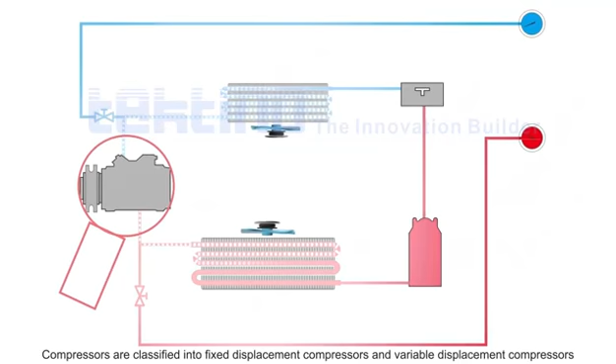Compressors are classified into fixed displacement compressors and variable displacement compressors according to different control mechanisms. Some variable displacement compressors do not have a clutch, and some have a clutch.

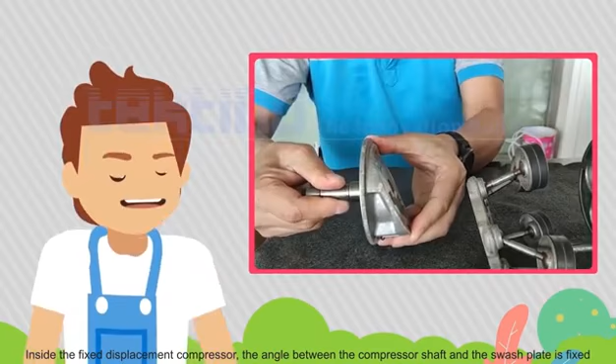Inside the fixed displacement compressor, the angle between the compressor shaft and the swash plate is fixed. Therefore, when the compressor rotates, the amount of compressed refrigerant per revolution is fixed.

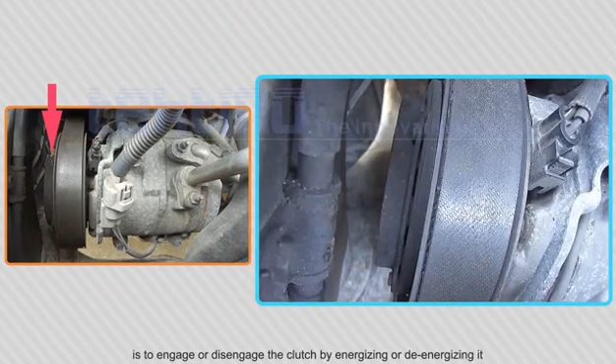The control of a fixed displacement compressor is to engage or disengage the clutch by energizing or de-energizing it. When the clutch is disengaged, the compressor does not work. When the clutch is engaged, the compressor starts to work. Once the compressor starts to work, the amount of refrigerant compressed per revolution is fixed.

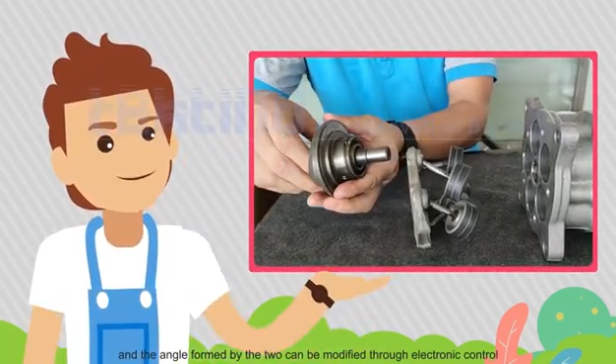While the connection between the compressor shaft and the swash plate of a variable displacement compressor is adjustable, and the angle formed by the two can be modified through electronic control. Different angles result in different stroke displacements of the piston, thus the amount of refrigerant compressed per revolution is changed.

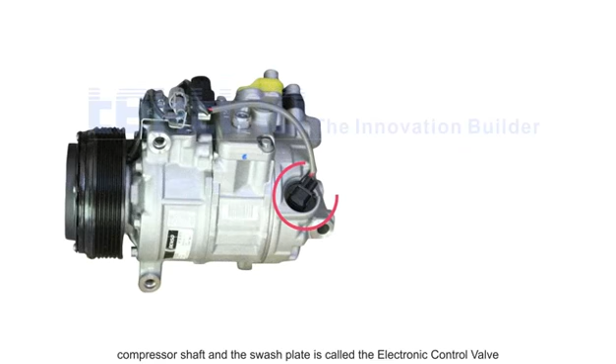The component that controls the angle between the compressor shaft and the swash plate is called the electronic control valve, ECV valve in short, located at the opposite end of the compressor drive belt.

The ECV valve spool has 3 orifices, which are respectively connected to the compressor discharge side, the suction side, and the crankcase. The angle of the swash plate is related to the pressure difference formed by these 3 pressures.

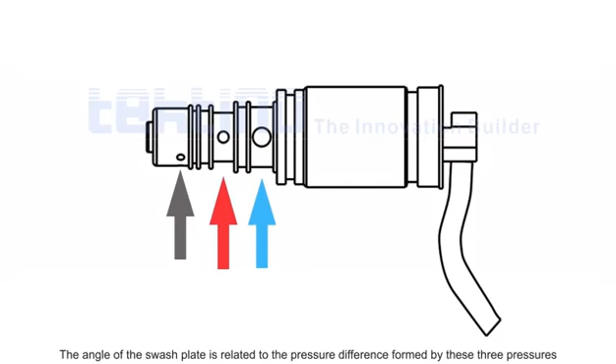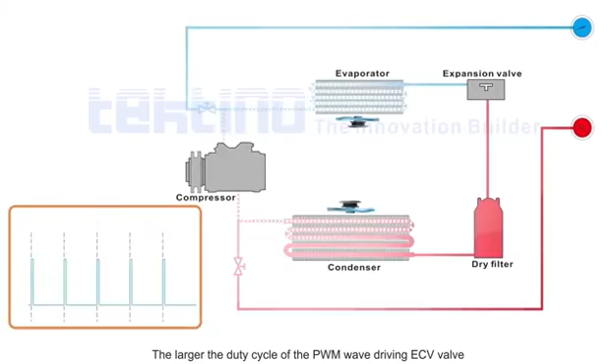The signal of the ECV valve is a PWM wave. By changing the duty cycle of the PWM signal, the compressor can produce different displacements. The larger the duty cycle of the PWM wave driving the ECV valve, the bigger the compressor displacement.

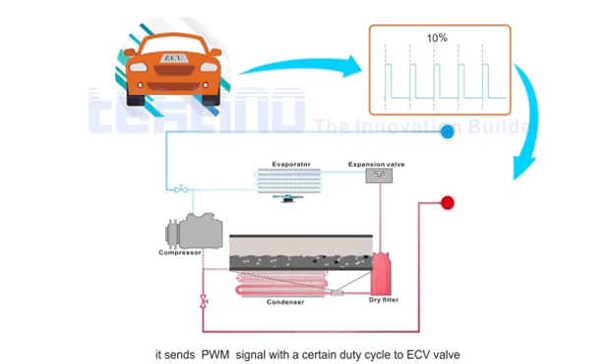The car ECU collects signals of various sensors, such as low side pressure, high side pressure, ambient temperature, cab temperature, evaporator temperature, accelerator pedal position, etc., and after certain calculations on these signals, it sends a PWM signal with a certain duty cycle to the ECV valve, so as to control the compressor to produce the corresponding displacement.